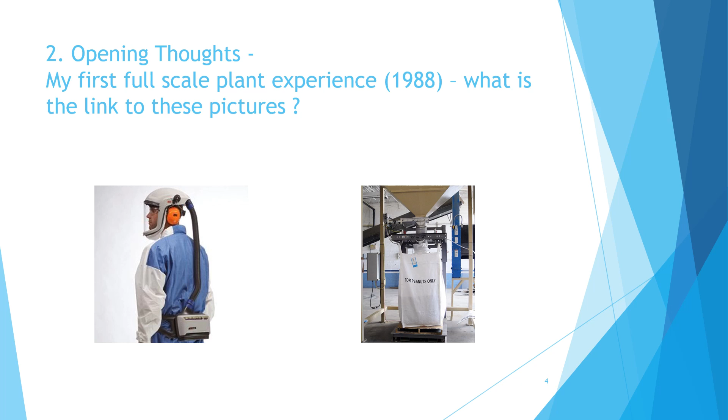Both problems related to an engineering design failure to account for different climatic conditions. Both examples are in India and subject to hot, humid monsoon conditions. It still continues to amaze me when I see expensive solids handling equipment designed only according to previous best practice, without any attempt to properly understand the material the equipment is meant to handle. It's a bit like an engineer in an oil refinery buying a pump without any consideration of viscosity. Yet, it still happens all too often.

It is unfortunately true that powders don't have a simple equivalent to viscosity, but that doesn't excuse the situation. At best, the end result is pain for the operators and some downtime. At worst, these problems can make a process uneconomic to operate.

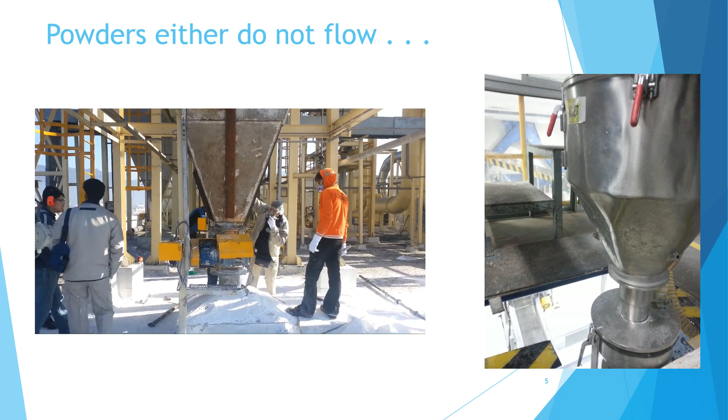If I recall correctly on this example, the key problem was spray flux. The liquid was being added too quickly and focused over a small area - too high a flux. The solution was more properly sized spray nozzles spread over the length of the drum.

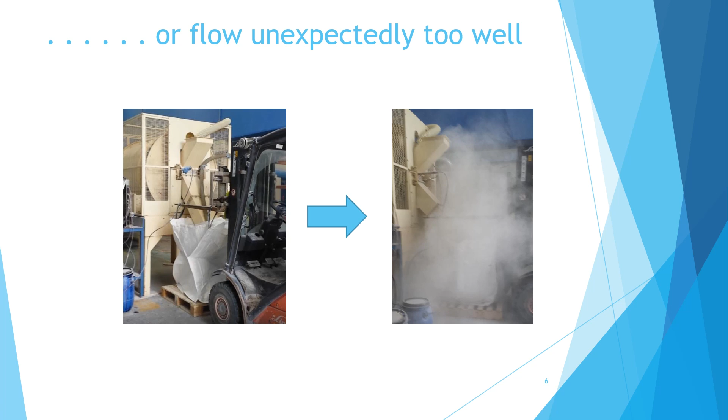You can see that the first mistake was not a pleasant experience for the forklift driver when the batch was discharged. Correcting the spray flux resulted in a non-dusty product, as produced at lab scale.

You may wonder why I made the opening comment about plant design, since this was a maintenance issue. Well, I'd like to use this example to make the point that detail is important.

So in this example, the choice of flexible connections was left to the installation team, who not surprisingly installed cheap homemade cloth type flexibles. Robust flexible connections are available for powder plants, but the design team must have felt that this level of detail was unimportant, so they left it to chance. In my experience on powders, specify everything if you want a safe and reliable plant.

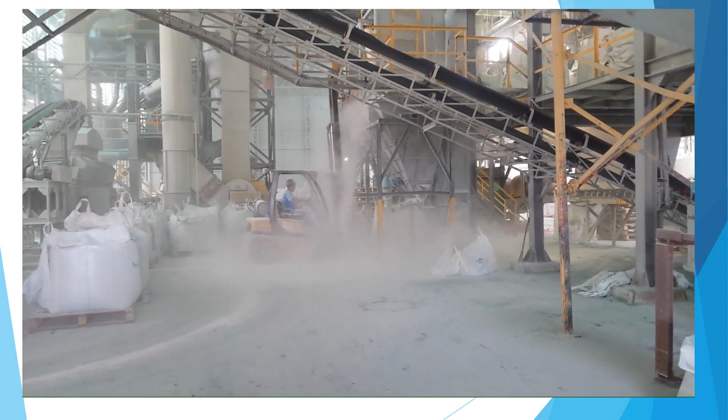To sum up my feelings from my early years in industry: a total lack of interest or belief by senior management in the point of doing any small scale experiments to predict the large scale. In defence of my senior managers, there was a serious deficiency in characterization methods for critical quality parameters on solids, generally just simple hand operated tests that had been used for many years.

As a process development engineer in a global FMCG company, I quickly realised that process scale-up was going to involve lots of travel, since management wanted full-scale confidence on new projects before committing to launch. This approach worked if you had large-scale equipment already in place, but was a disaster for project costs, although good for frequent flyer miles. I also realised the remarkable resilience of process operators to deal with poorly designed equipment, and finally, this looked like a good career choice for lots of challenges and excitement.

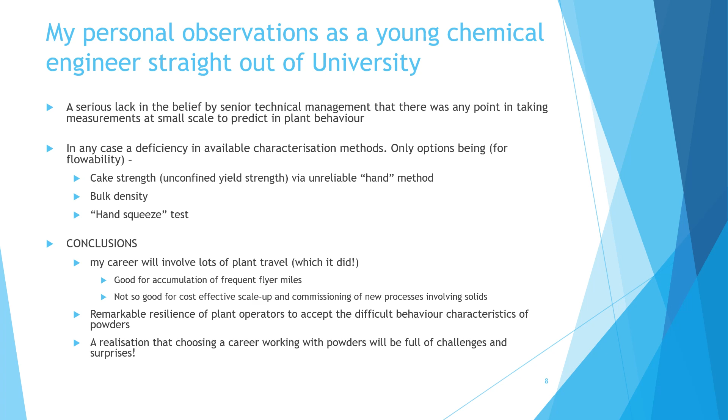Moving on, I'd like to share my personal observations on the evolution of bulk powder flow measurement techniques from the early 90s to the present. When I started in industry, powder flow was mainly assessed by an unreliable cake strength test or simple pour test. This was part of the problem driving senior management insistence that all changes had to be tested in the plant. In the next few slides I'll talk about early attempts to introduce better methods, the introduction of the Peschl test, and more recently the introduction of the Freeman FT4.

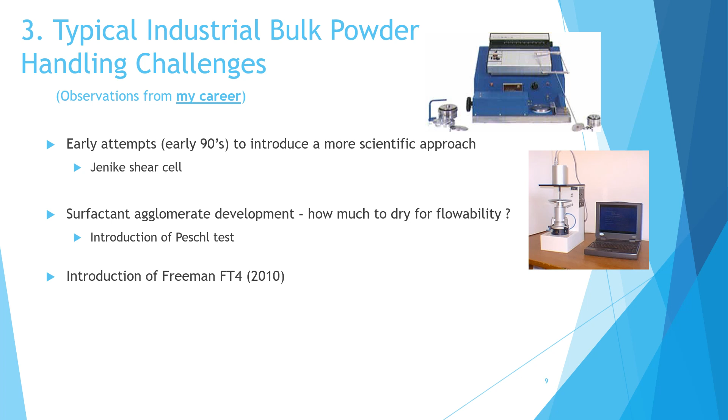The baseline was the so-called cake strength test, or unconfined yield strength, typically done by hand, thereby introducing lots of variability. A well-intentioned senior technical manager arranged the purchase of a Jenike shear cell. In an industrial environment, it wasn't possible to dedicate a full-time technician, leading to unreliable results, plus no one really knew how to interpret the data except for hopper design.

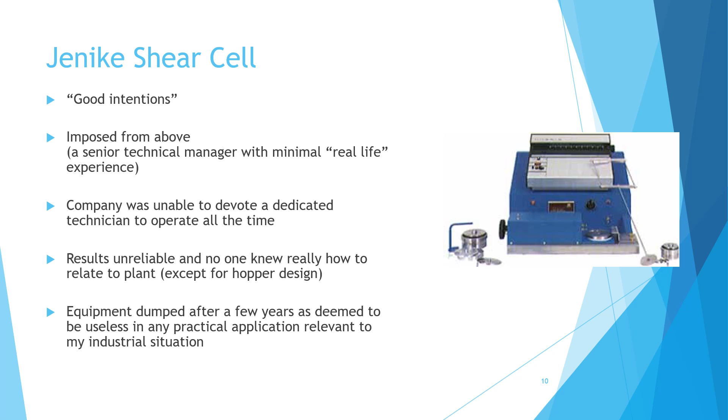In the early 90s, I was working on a project where we needed to know how much to dry a new agglomerate so that it would flow okay through existing silos. This was a critical question, since over-drying would cost more in capital investment and running costs, plus the material would be more friable, which was undesirable.

We needed an accurate flow test that would allow the identification of an operating window, which would enable the design of the fluidized bed dryer to robustly provide material with good flow winter and summer, without being over-dried, wasting money and potentially impacting product quality.

The Peschl test was identified, and due to its operation being semi-automatic, it produced a generally reliable output. We used the Peschl test to measure pilot plant product and successfully identified an operating window which worked when we built the full-scale plant. The Peschl was used for many years until becoming obsolete.

Its capabilities were, however, limited purely to silo design, so it was unable to help with a host of other powder flow related questions.

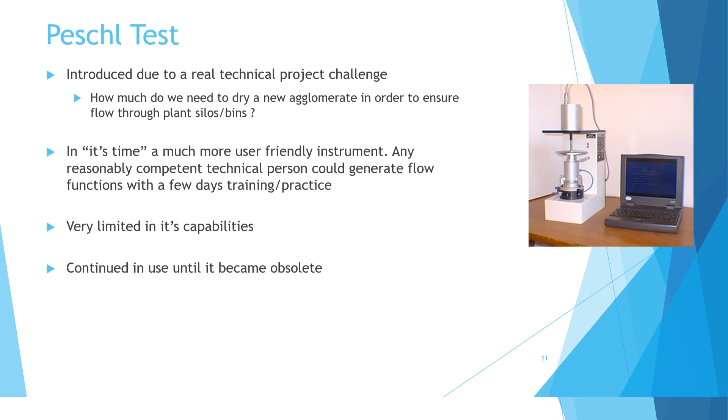Support for the Peschl test was discontinued, and P&G was looking for powder flow characterization tests with wider capabilities. I was introduced to the Freeman FT4 in 2010. It was deployed to replace the Peschl test, but with many broader options. Like the Peschl, its operation is mainly automatic, but with a vastly superior user interface and built-in features such as linking your shear cell data to silo design parameters.

The range of available tests extends far beyond simple shear cell testing. And whilst not all the tests have strong relationships to scale-up parameters, the wider range of tests make it very useful to study many more problems linked to powder handling. It became well accepted in P&G and was deployed in most regions. The big challenge is still around linking these lab-scale measurements with process behaviour, beyond simple silo design.

This can be done, but requires effort. For example, I developed a link between flow energy and powder dosing accuracy in a packing line, but much still remains to be done in this area.

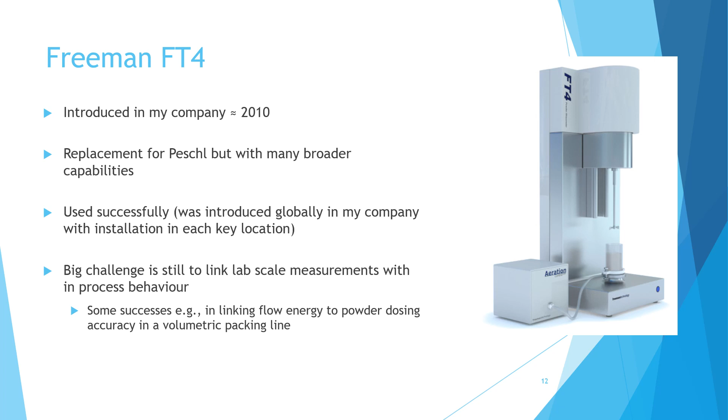Now I'd like to move on to share my experiences on the solids handling challenges coming from complex formulated products. I will discuss first, what is a formulated product? Secondly, a personal example where I played a leading role in the process development and scale up to manufacturing. And finally, my thoughts on new technical directions in this area.

So then, what is a formulated product? Quite simply, a product made of a mixture having a higher value than the sum of its parts, with the added value coming from the expertise in putting together the formula. Common examples being detergents and foods, with less obvious examples such as crop protection granules for dissolving crop sprayer tanks or granules for lawn care.

Top solids handling related problems coming with formulated products include dose consistency. The composition for every use should be exactly the same. It generally isn't, due to segregation. This is very important for consumer satisfaction, which can drive critical success factors such as repurchase intent.

Segregation could mean you only have one crouton in your cup of soup, or it could be low or too high bleach in your scoop of detergent. Either way, the product isn't as intended, and maybe you'll choose to buy another brand next time.

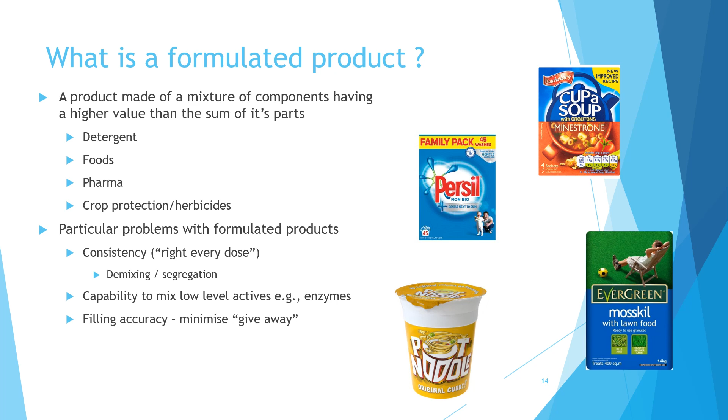The difference is giveaway, so called because it's above what you plan to give the consumer, and caused by variability in your packing process. If you had a perfect pack filling process, giveaway could be zero. Giveaway can amount to millions per year on big volume products. In packing, process engineers put a lot of effort into minimizing giveaway. I know, I spent quite a lot of time in this area myself trying to make products inherently easier to fill with less variability.

I'd like to discuss a personal example when I was involved in the process development for Cascade ActionPacs, a US unit dose auto dishwashing product. This was a unique new product consisting of separate powder and liquid compartments contained within water-soluble film. In an attempt to save costs, the engineering team developed in-house a very simple powder dosing concept consisting of a fixed volume container with simple upper and lower slide gate valves. The concept was built and failed due to bulk density variations causing unacceptably high weight variation from pack to pack.

For me, this was a classic example of not understanding process requirements before diving into equipment selection. The team developing the slide gate concept knew that the requirement was to fill by weight, but they devised a concept that fills by volume with no adjustability. Basically, they had assumed that the product bulk density would be constant. In a complex mixture of more than 10 materials, this is certainly not the case, and the weight variation was simply mirroring the density variations of the feed.

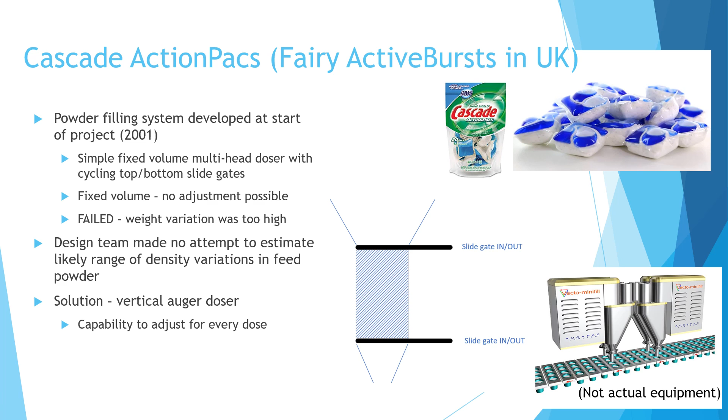The solution was a vertical auger doser, which had the capability to accurately adjust the dose-to-dose volume by volume. This is still a volumetric concept, but critically it can be adjusted whilst running. This enabled a feedback control approach which delivered the desired pack-to-pack weight control.

Now, I'd like to share my experiences on how many companies are reaching out externally to build knowledge and solve problems. Procter & Gamble calls this connect and develop. Many large multinationals have historically been very secretive and prefer to handle all development in-house. This is changing. Before I left P&G, I was involved in a significant shift towards external collaboration.

One good example is the UK Engineering Doctorate Programme. EngDocs allow industry to directly influence PhD level research to be very focused and relevant to industrial needs. I was a supervisor for one EngDoc which was focused on powder buildup in auger fillers. These are extremely common devices handling materials ranging from detergents to foods.

In the previous slide, I explained how this type of equipment was successfully deployed to fill powder in the Cascade ActionPacs product. One problem in laundry detergents is that due to the typically high organic component of the formulation, the powder can be quite sticky. This can lead to product buildup in the auger and frequent downtimes for cleaning.

Compared to traditional PhDs, the EngDoc program allows high focus on specific industrial problems, in this case understanding what causes powder buildup in auger fillers. The project was a success and developed understanding which we were able to directly apply in the laundry powder packing lines to solve build-up problems.

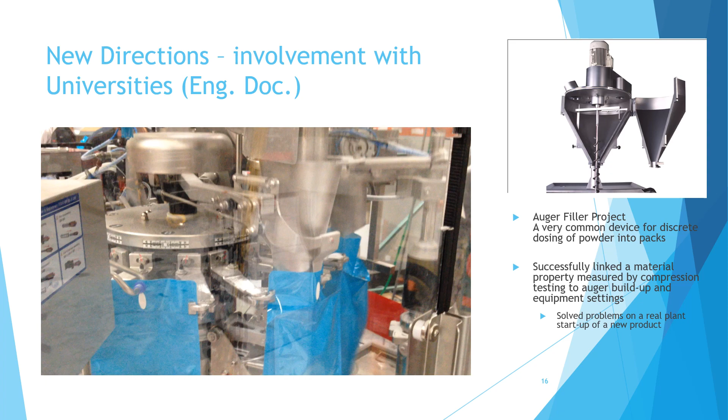The picture shows a cutaway of an auger filler internals, and the video is an example of an auger filler dosing powder into bags on a rotary filling head.

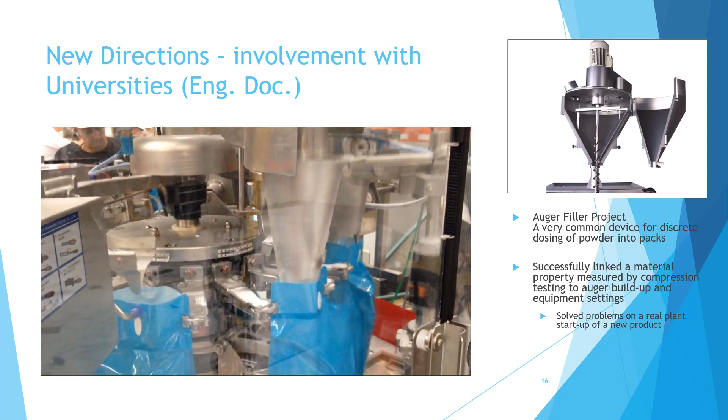To close with my thoughts for the future, how do we achieve this lighthouse vision to link easily measured powder properties to process plant design and operation? The link between material properties and process conditions is the key point. A process makes a product, and the challenge is to link meaningful product quality measures, such as bulk density, to the process levers. I will come to this in my next slide.

Industrially relevant measurement systems for solids are becoming much more prevalent. We need to deploy them, use the data they produce, and accept that we can all play a role in furthering our understanding. A critical factor driving change is that, in my experience, senior management will no longer accept or fund lengthy startups on solids plants, thus driving the focus to small-scale understanding.

And finally, we can benefit from vastly superior capabilities in the collection and manipulation of process data, coupled with new inline measurement techniques such as the Lenterra probe for powder flow. This is key to drive the necessary depth of understanding.

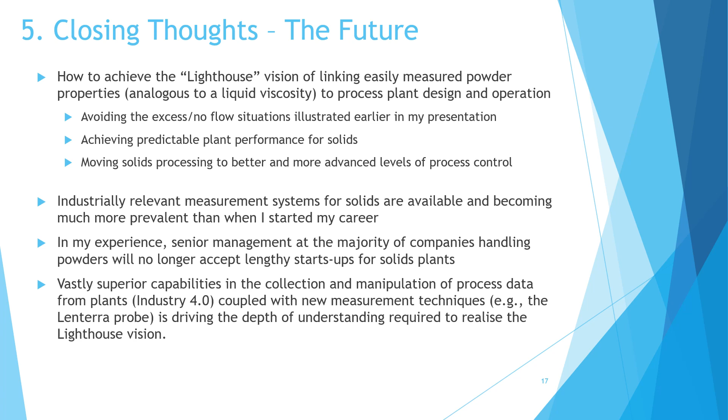In a typical powder processing plant for formulated products, the packing area accounts for at least half of the plant footprint and often at least equal capital investment. Packing is a critical area for both cost and consumer satisfaction. In the bulk making side of the plant, the product will be produced to match strict quality limits. However, this effort can be wasted if the quality of the product in every pack is not the same.

Factors such as segregation and particle attrition can lead to unexpected quality problems with the product actually leaving the factory for consumers. In addition, money can be lost if the packs have to be overfilled to respect minimum fill regulations due to poor dosing control.

The area of powder packing is a major gap both within industry and in research centres, where I'm not aware of any setups aimed at developing deep understanding of powder processes at industrially relevant scale. I was privileged to be involved in developing such a facility at the Centre for Process Innovation, which enables the study of multiple powder processing unit ops linked to packing.

Plus, this is coupled with state-of-the-art online instrumentation for both process parameters and product quality attributes, also complemented by an impressive powders lab.

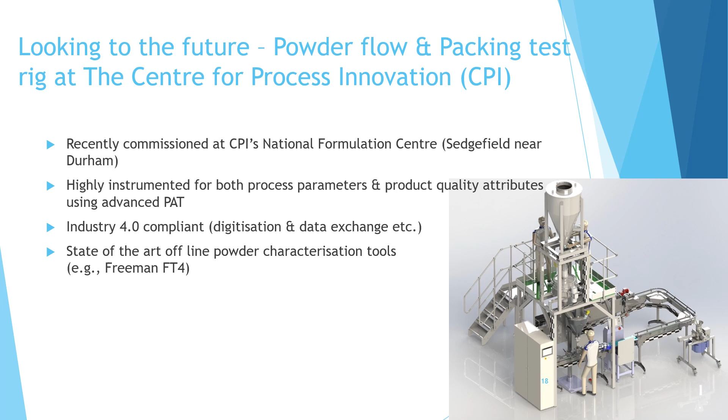This slide is to give a snapshot of the type of instruments available on the CPI test rig. The rig is controlled by a PLC with a large screen user interface for easy control and real-time viewing of parameters. The heart of the data acquisition system is two rack-mounted industrial PCs, which interact with a host of advanced online analytical instruments, together with all process conditions such as flow rates, motor speeds, temperatures, etc.

The online analytical instruments provide information on product composition via spectroscopy, particle shape and size via advanced image analysis techniques, and bulk density by low-level radiation.

This type of rig, coupled with offline measurements, will drive the required depth of understanding to achieve my lighthouse vision. Please feel free to get in touch with me if you're interested in accessing this facility based at CPI in the northeast of England.

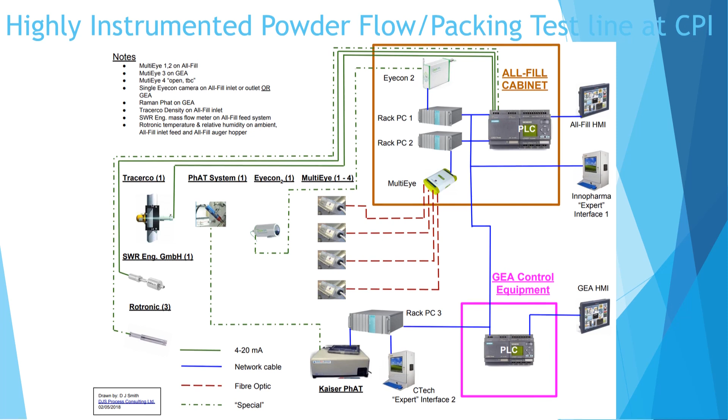So, the technical capability is becoming available, but what more is needed to make real progress? A belief by decision makers that it is worth the effort. Speed and cost are the best arguments. It is well documented that startups of solids processing plants run way over budget and schedule far more often than fluids-based plants. Startup delays can easily run into millions in costs, plus knock-on effects such as, for example, missed launch timings.

Secondly, a passion for data collection. When I started out in industry, I was recording data in a notebook. Thankfully, those days are long gone, but I'm still surprised all too often by the lack of interest in the data that is typically available from a modern PLC-controlled process plant. Why? Well, the problem seems to be a combination of stretched engineering resources in most plants, coupled with the fact that extracting the data is not intuitive.

This is actually an area where my company offers solutions to add user-friendly front-end interfaces on top of existing plant data systems to make data extraction and analysis as easy as ordering something off Amazon.

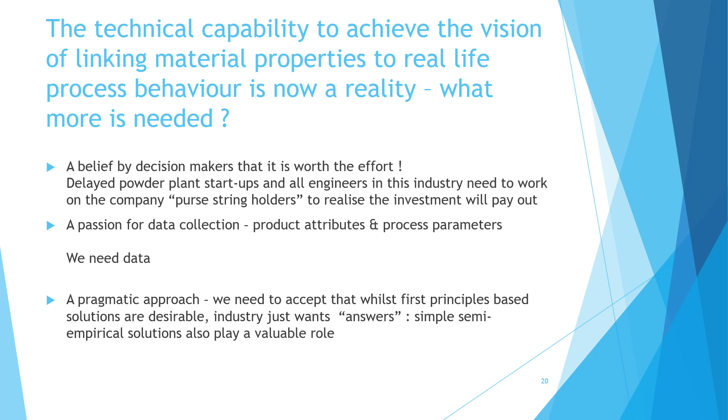And finally, speaking from an industrial perspective, we need pragmatic solutions, where currently in solids processing little predictability exists, except perhaps for silo design. Industry wants simple answers. It is the very complex nature of solids that means first principle-based approaches have to be blended with empirical and big data approaches to provide the answers needed by industry.

To close, I'd like to say a few more words about what we do at DJS Process Consulting. Our mission is to partner with our clients to help them achieve their business objectives by leveraging the technical, project management and business leadership skills available via our team of experienced consultants. Typically, we partner with our clients on projects and work alongside client employees to achieve project deliverables.

We have a core set of three areas of service. Firstly, consultancy. Core areas of expertise cover the full remit of R&D activities in formulated products, with a strong focus on product and process development, intellectual property development, scale-up and process optimization.

Secondly, engineering design and project management. DJS Process Consulting can provide fully outsourced engineering and project management services. These include development of process flow sheets and P&IDs, full 3D and virtual reality CAD plant layouts, equipment and electrical specifications, quotation and vendor management, and overall project management.

And finally, intelligent manufacturing, or IMP as we call it - hardware, software and remote technical support for your production lines. Here at DJS Process Consulting, we see a trend towards lowering of staffing of experienced level engineering support people in manufacturing facilities for FMCG and other products.